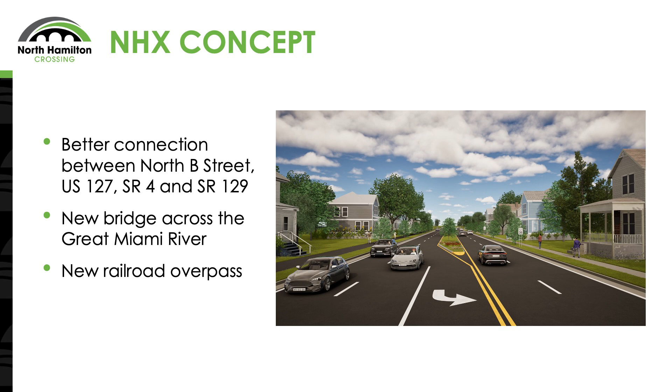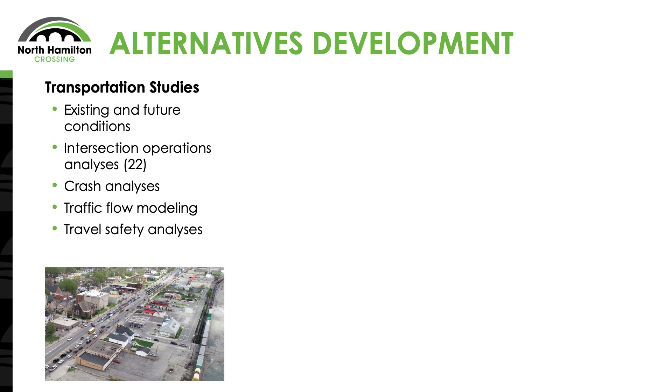A lot of work has gone on over the last few years to develop the alternatives further. Some of the studies conducted looked at traffic volume, dangerous intersections we're trying to improve, how traffic flows through town from east to west, and how we can make it better.

We also conducted a number of environmental studies. The alternative that moves traffic most effectively isn't always the best, so we considered how each route will impact people in the surrounding area. As a result, we looked at cultural resources, historic resources, ecological and regulated materials, hazardous materials, recreational, and community features.

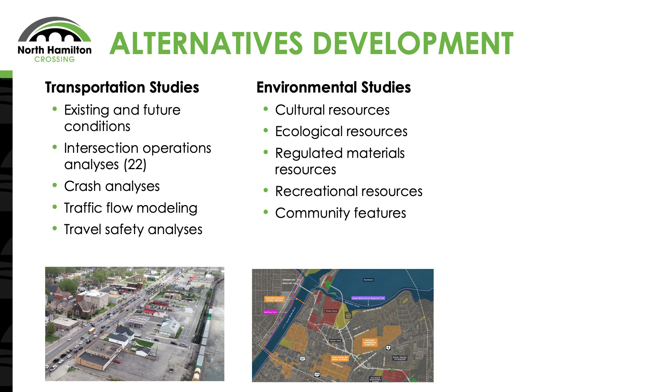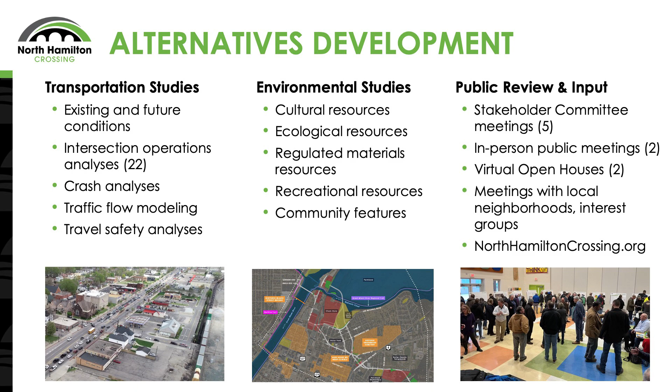Public input was extremely important throughout the process. We had 5 stakeholder meetings, 2 in-person public meetings, virtual open houses, and numerous meetings with local neighborhoods, interested groups, and individual citizens.

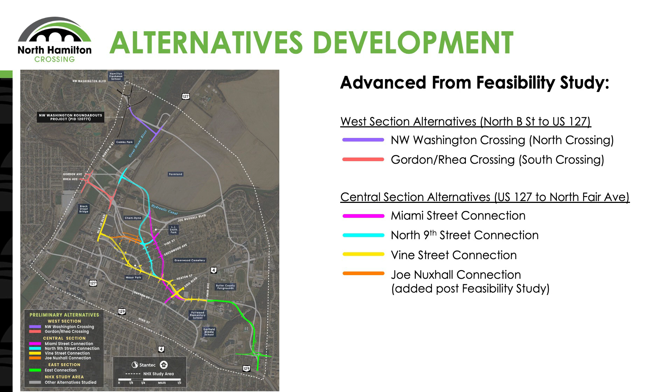Through the feasibility study, we developed and studied 18 different routes. Using study results and public input, we narrowed these down to several alternatives and divided them into sections: west, central, and east. Since then we've been evaluating the number of alternatives, and we've also added a few that came up during the public input process.

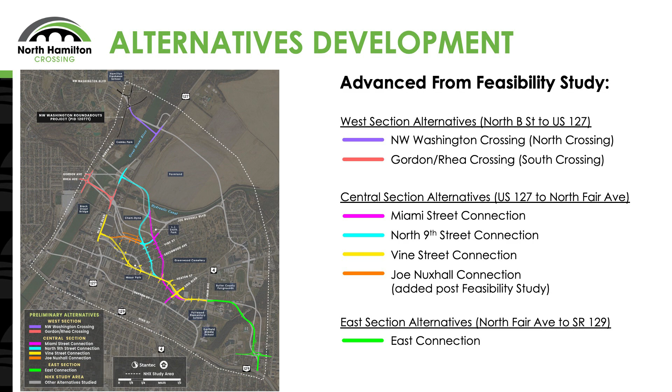Our findings and recommendations are in the next sets of slides. The west section shown here includes 2 roundabouts that are already funded and scheduled for construction in 2027, at Northwest Washington, West Elkton, and North B Street, shown in white.

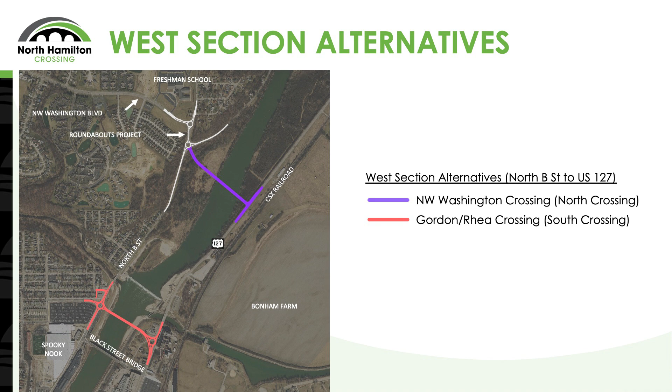We had 2 river crossings shortlisted for further evaluation: one at Northwest Washington that would come off one of those roundabouts, and a second down at Rhea Avenue, closer to Spooky Nook. We currently have a funding application for the west side river crossing at Rhea Avenue and Gordon.

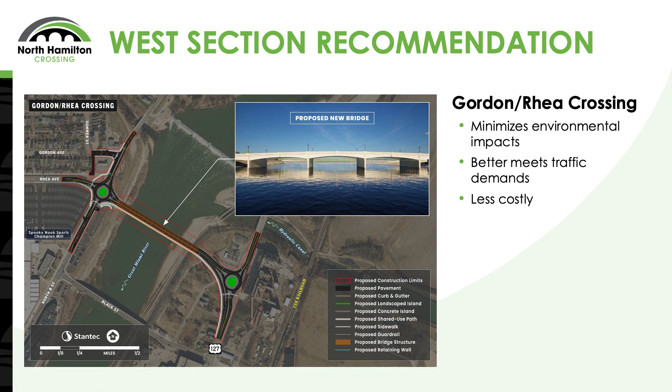The recommended west section is the Gordon-Rhea crossing, shown here. This includes a roundabout on each side of the river and intersection improvements at Gordon Avenue. This option was selected because it minimizes environmental impacts, better meets the traffic demands identified in the project, and was the less costly of the two.

What we refer to as the central section takes people from 127 over to Fair Avenue. 4 different alternatives were evaluated in great detail here. 2 of these alternatives came up as a result of input at earlier public meetings: Vine Street and Joe Nuxhall.

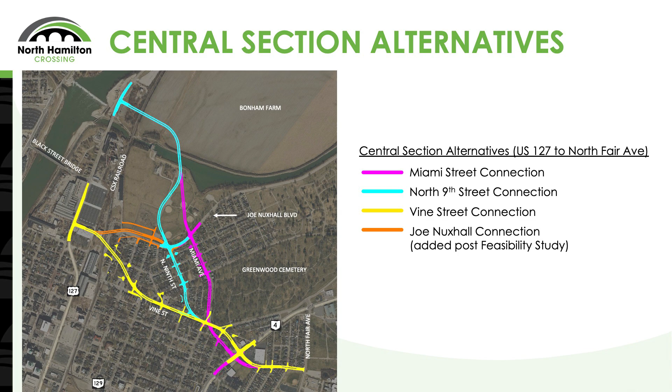The recommended central section, the Vine Street connection shown here, avoids the L.J. Smith Park impact, Chem-Dyne, several historic properties, and impacts on the hydraulic canal. It also better meets the traffic needs of the other sections evaluated and maintains traffic on Heaton Street, which is already a major collector in the neighborhood.

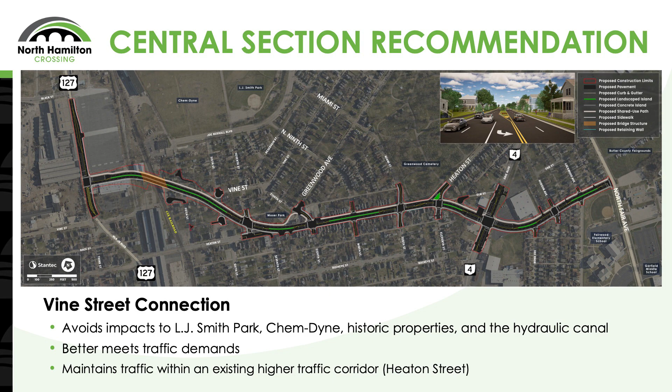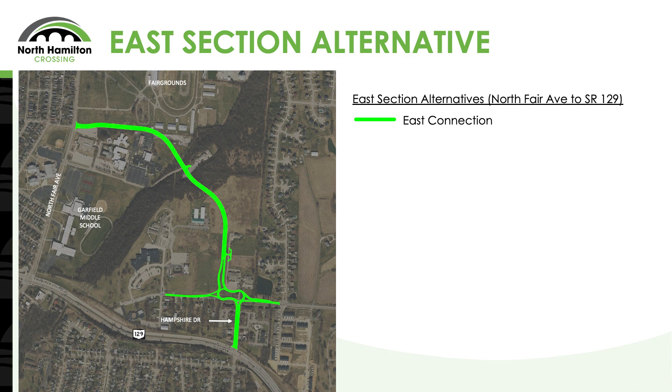The east alternative was shortlisted very early in the feasibility study. The alternative you see here in green is the recommended one. This improves traffic on State Route 129 compared to no build. It eases congestion at the Princeton and Hampshire intersections, and it benefits Fair Avenue by diverting traffic that would otherwise use Fair to get to Route 4 from 129.

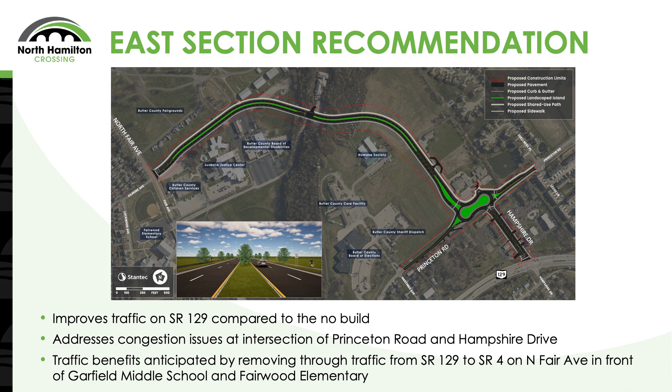Traffic benefits include removing traffic from State Route 129 to Route 4 on North Fair Avenue in front of Garfield Middle School and Fairwood Elementary. This is the recommended preferred alternative for the overall project. The map shows the preferred routes for each section and how they fit together as part of the larger North Hamilton Crossing project.

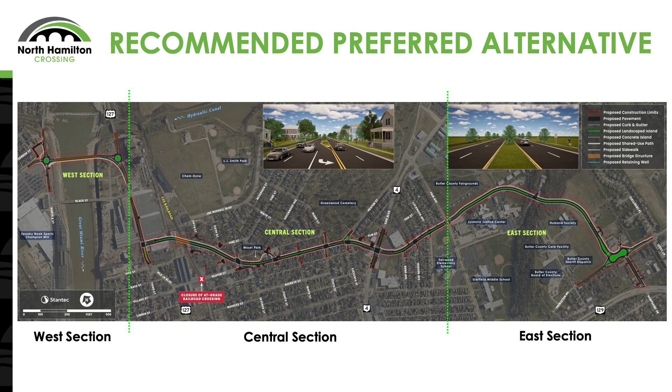Next steps will be to gather public input on this recommendation, prepare a formal environmental assessment documenting the studies completed and their findings, identify measures taken to minimize impact, and summarize the comments from you, the public. This will then be formally submitted to ODOT for NEPA approval. We anticipate holding the public hearing for the preferred alternative early next year, with another opportunity for public comment.

Currently, we have enough funding to complete the environmental assessments and preliminary design for the overall route. Future funding for detailed design will come as opportunities arise and funding is secured. The west section is expected to move forward first because of the age and condition of the Black Street Bridge. Planning and preparation for that section will likely take 3 to 5 years to complete, plus construction.

The timing of the central and east sections is undetermined. Specific timing depends on our ability to secure funding and when that's awarded. We will pursue funding opportunities for the entire project as they become available. With that, I'll turn it back over to Dan to finish off the presentation.

Thanks, Alan. Right-of-way, which is the land the roadway sits on, for the North Hamilton Crossing — we are planning a boulevard section with a roadway that has 2 lanes in both directions, as well as a landscaped median and sidewalks, as Alan described earlier. It will be wider than the current roads.